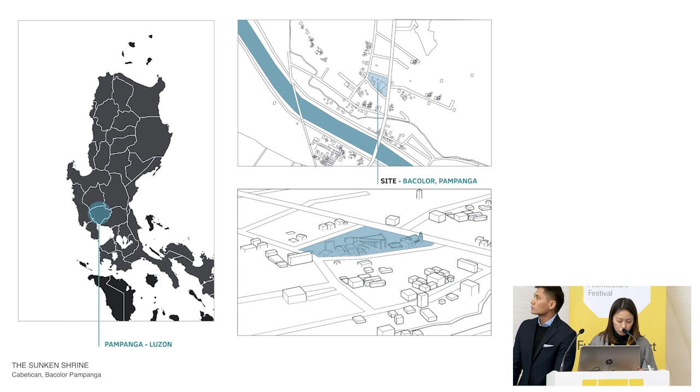The shrine is located in the small town of Bacolor, Pampanga, which is situated in a fairly flat land nearly on the center of the Philippines. Bacolor is sitting just below the foot of the mountains of Pampanga. One of the largest mountains sitting beside the town called Mount Pinatubo, however, happens to be a majestic sleeping volcano.

Day became night, keeping the skies dark for days. Communities have been evacuated to safer ground, yet the devastation was immense. The blast's volcanic discharge reached hundreds of kilometers and left towns within its perimeter covered in thick ash. There was zero visibility and hardly clean air to breathe.

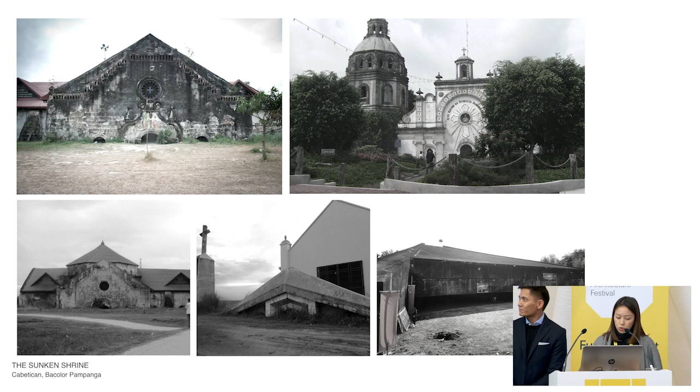From the eruption, it went on for the next 4 years with consecutive strong rains and storms, landslides that continuously channeled the ashes from the mountains into the towns, that became rivers of thick mud that painstakingly settled through time. At this point, people knew that it was never going to be the same. These are the photos of some churches and the shrine included at the lower right after the eruption.

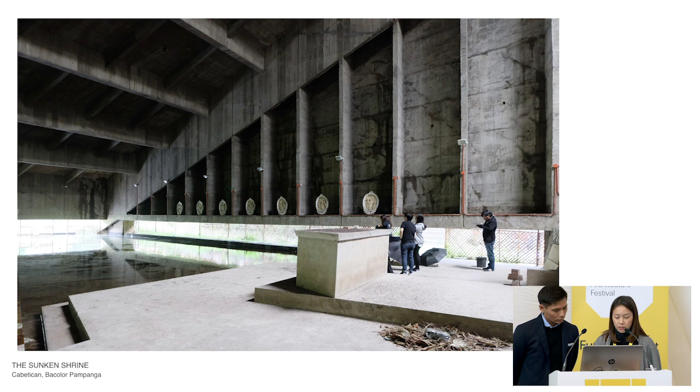As we entered the sunken interior space, we were absolutely awed of its beauty, order, and grandeur. There was a high chance for the structure to be revived, re-celebrated, and to resurface. The amplified horizontality and expansiveness of the temple engenders feelings of calm, serenity, and stability. Unfortunately today, with just little rain, it is already flooded and totally unusable.

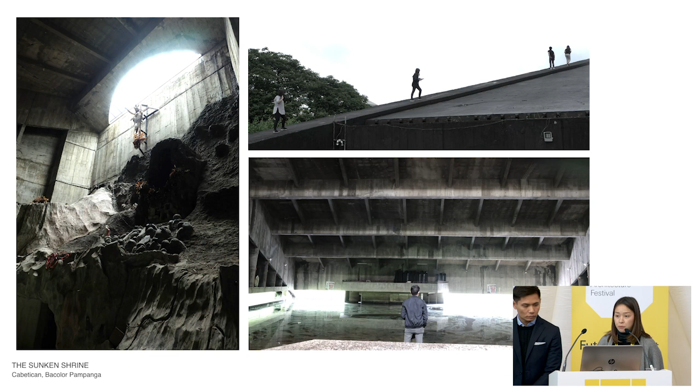Mount Pinatubo's fury may have severely altered aspects of the shrine, but the changes are not incongruous and may even be more in keeping with its raw and unpretentious architecture. Using our team as a scale, one must crouch to be able to enter the low openings, and the low lighting all contribute to the cavern-like atmosphere that, no less daunting than before, has become much more humble and intimate.

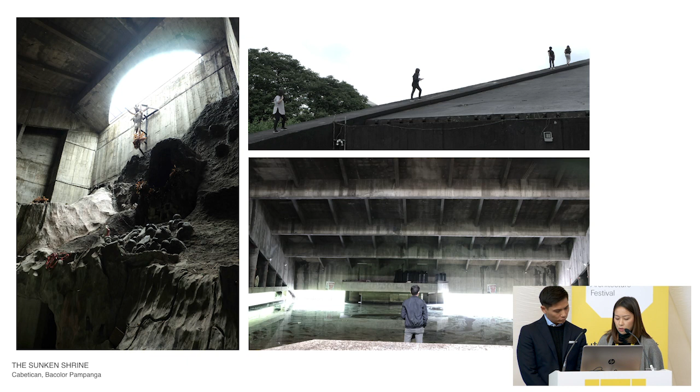Now we would like to present to you our design. Our primary goal is to create awareness in response to the rapid disappearance of some of the most important buildings in the country. This diagram shows the existing condition of the site. The transitional church is situated on the left, where masses are held.

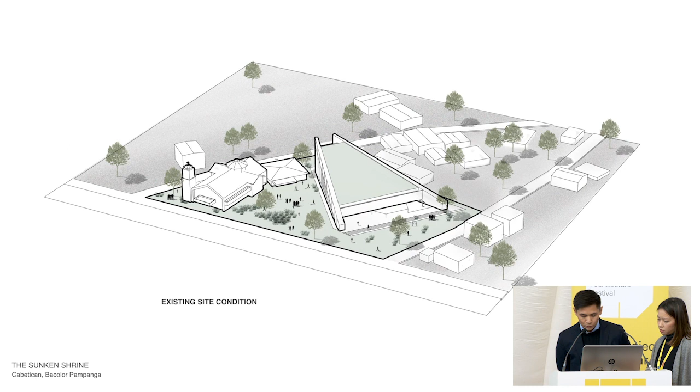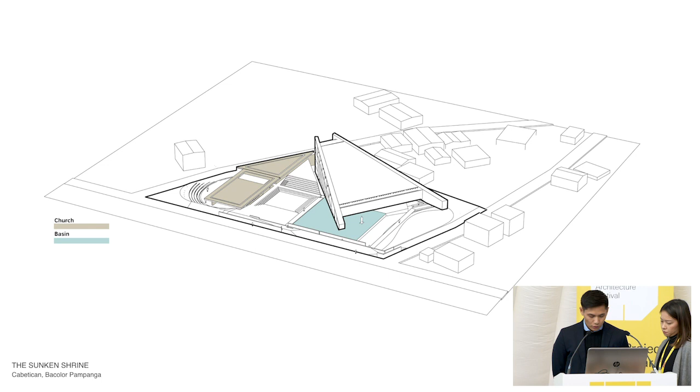In keeping things relevant, we simply flatten the structure to give importance to the main shrine, avoiding any unnecessary noises. We provided a large underground water storage in the center, calculated to store almost twice the amount of maximum flooding inside the site premises. To give it our full respect, we never considered doing any alteration to this wonderful ruin. Rather, we had to make sure that everything that surrounds it contributes to the overall experience of the community.

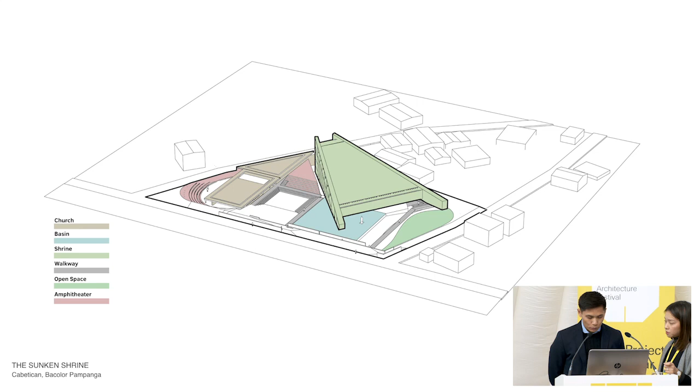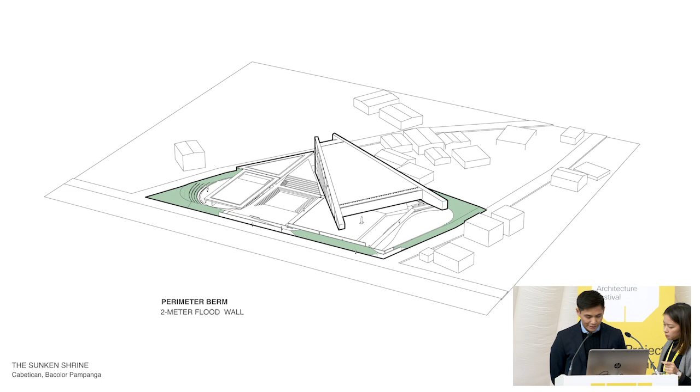The gray shade shows the floating walkways of the main public square entry and leads people through a processional approach to the shrine. The red shade shows these steps and seating areas along the edges and corners to allow public events. The green band shows the most important feature, which is the flood wall we integrated. It is designed to keep out water to the entire 5,000 square meter area, yet integrated with natural vegetation as berm.

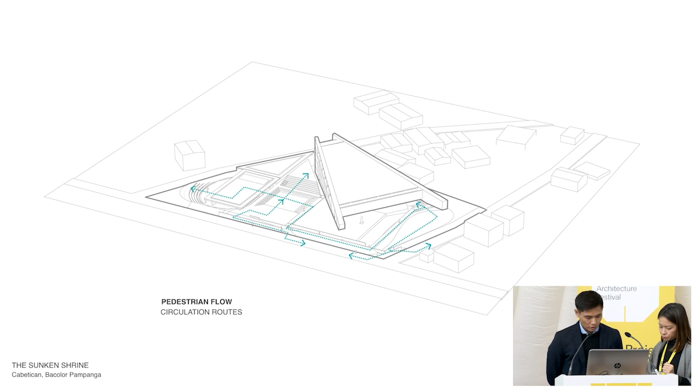This shows the circulation from the front entry along the road. It goes directly to the central square, which allows people to freely use the perimeter for recreation. Yet the approach to the shrine is through the reflection pool. The water collection system is designed hidden under the pool. It is capable of draining about 2.4 million gallons of water during the worst monsoon seasons. It will be pumped out once the water levels subside.

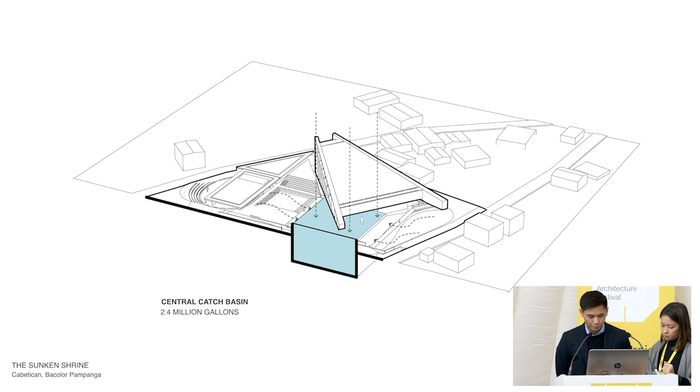This is an outline where we plan to locate locally sourced lahar sand, volcanic boulders, and raw vegetation. Since the lahar settled, turning greens and rivers into bright, hot, sandy surfaces, converting our roofs into roof gardens will then help decrease the reflection of unwanted sun rays and in turn minimize heat, a contribution to the reduction of heat island effect in the neighboring residential area.

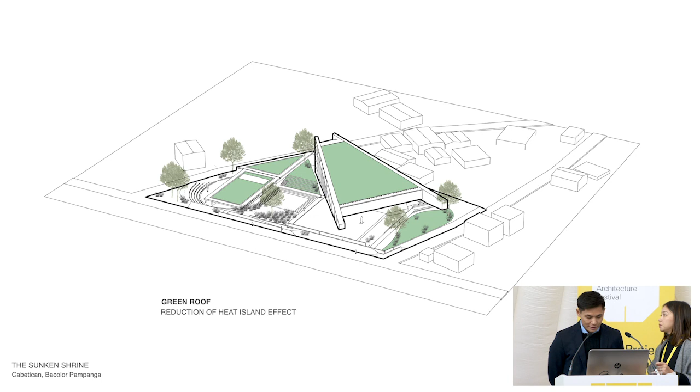Then this is the diagram of the designed new site. Our team's approach since day one was design in presence and in absence. Creating a flood wall that doesn't look like a barrier was crucial to the daily view of the town. We expect a variation of flowers blooming in various seasons. This is a view of the ramp showing the main shrine as the focal point.

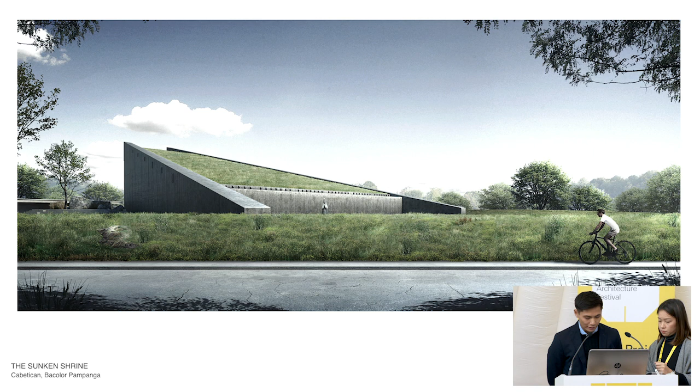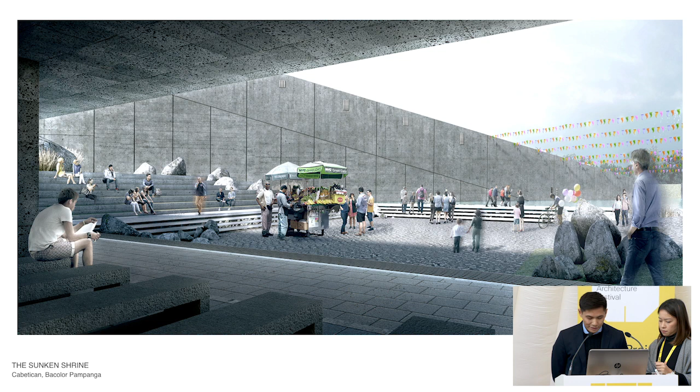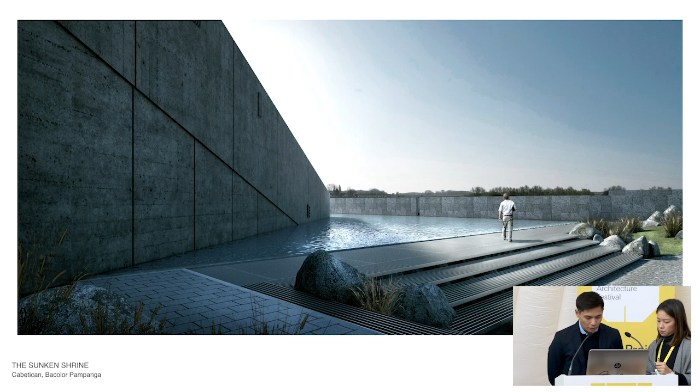Upon entry to the main grounds, there is a public square for the community to hold events or just enjoy a Sunday with families and friends. This space is designed for them. In approaching the shrine, fine modular stainless steel gratings were used for the steps and walkways. There is a reflection pool that will lead you to the entrance of the main building. The body of water is also designed for the children and the people who previously had a similar but smaller feature where they used to play.

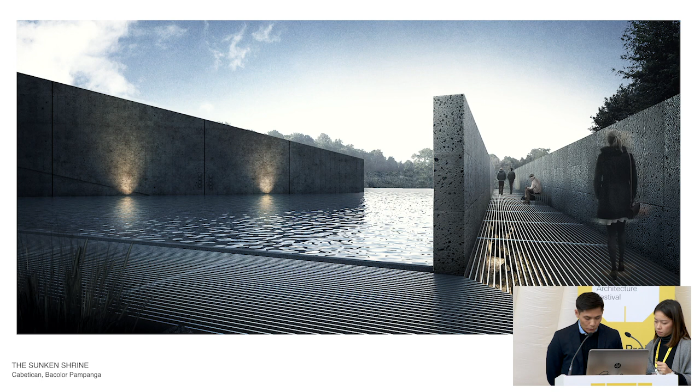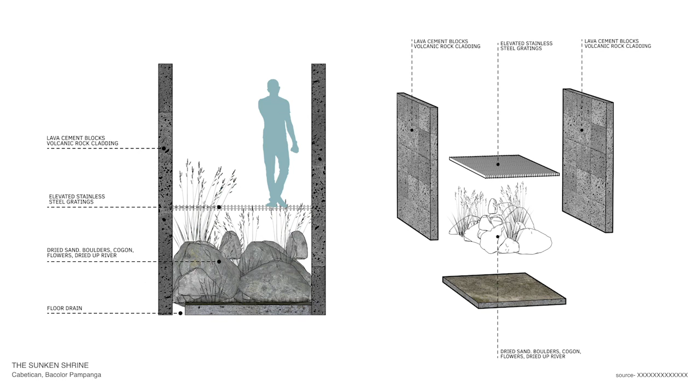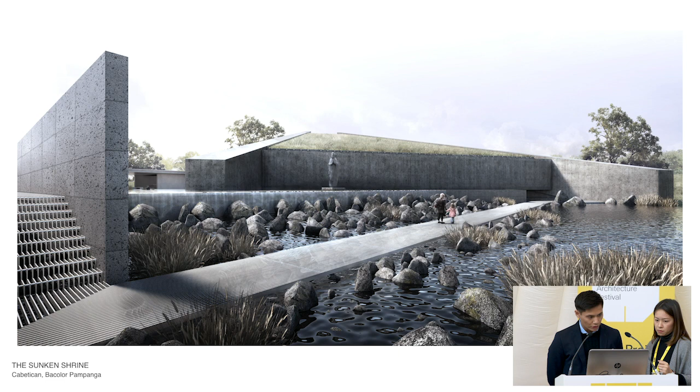This view is the final turn upon approaching the shrine. It reveals the facade, the original position of the statue, but then already floating above the water. The small opening on the right is the entrance of the building. Since we have a limited budget, we decided to use the simplest of materials. We plan to get them within a radius of a few kilometers. The cement requirements will come from Porac, a nearby town, one of the largest cement factories using lahar sand. Also, the wall finishes are in lava stone that came directly from the volcano itself.

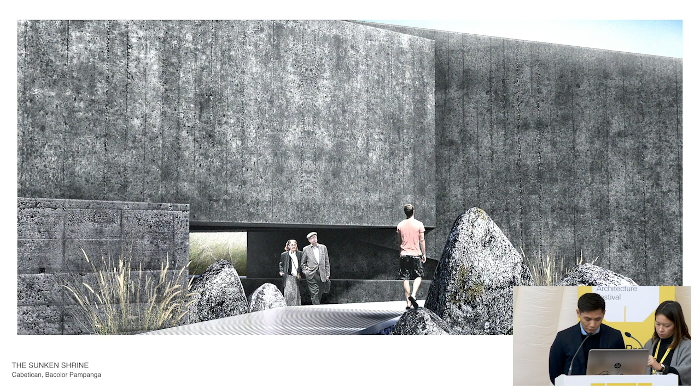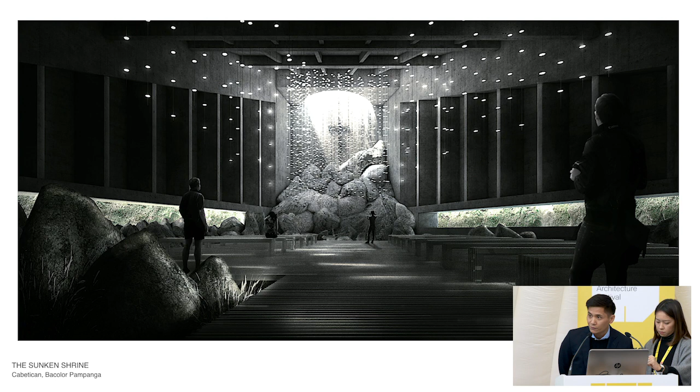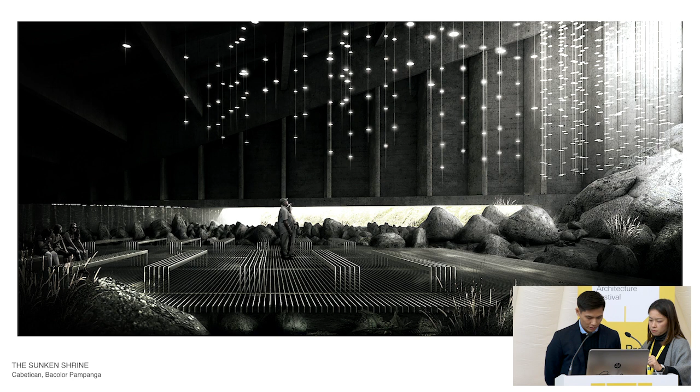We believe restoring such a building can somewhat restore the faith of the community. Since we knew that the people have been used to entering the shrine through these very low openings, we decided to keep that powerful yet humbling gesture in entering a sacred space. We kept the opening to only about 8 feet. And once one has entered, an interesting reveal of the volume will be experienced. The same materials will be used for the internal space as the main platform and also for the benches. Again, raw landscape was placed underneath the people to enhance its history. Such strong memories can never be erased nor forgotten.

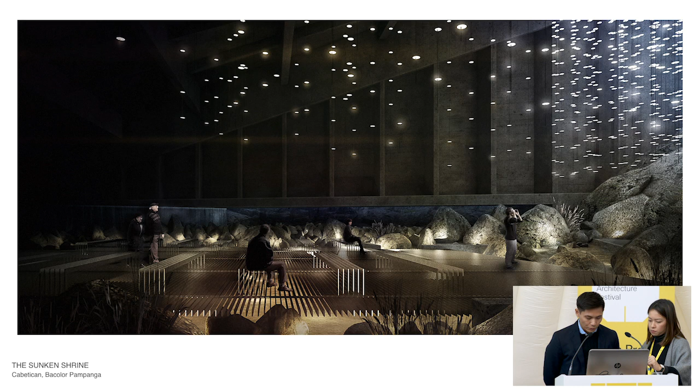These are suspended mirror reflectors that can allow natural sunlight to disperse from the skylight above. And at night, these 722 hanging lights will glow in remembrance of the 722 souls who perished. The lights, which are focused mainly on the landscape below, are an opportunity for one to reflect peacefully without any distraction and allow one to experience the raw textures and real history that we brought back into the internal space.

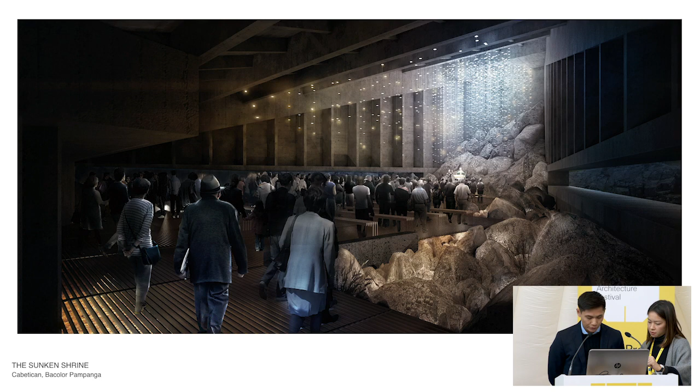In this final image, we show our vision of the community celebrating the space again. Though the Anthropocene is marking the moment of humans having power over nature, this approach is to remind everyone that the relationship between man and nature can reciprocate in perfect harmony.

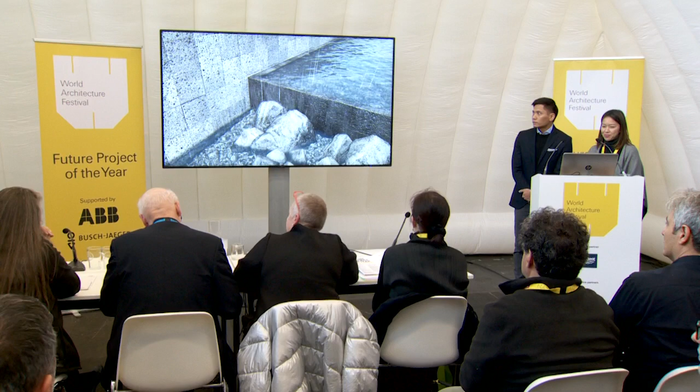Can I just ask, bringing the nature inside, are those rocks and boulders there, or are you bringing them in? And the second question is the light, the floating, is that device implemented by you, or is it part of the existing building? Well, thank you for the question.

First of all, these boulders are actually very natural to the site, especially within the town of Pampanga, which is actually sitting below the volcano. So these boulders are scattered, and actually they ate all the water streams and rivers around the area. So before, these green landscapes and waters now actually became a desert of sand. So what we're doing is we're just gonna bring everything there.

The actual condition of the site is actually sort of a higher flat slab, which is about this level. So you're digging out? Yeah, we're gonna dig it, but not completely. So we're just gonna make it work so that there's sort of an inlet of cool air, and actually the people can go through about 8 feet high.

And these lights are not there. If you've seen the photo earlier, the structure is actually completely bare. There was actually not too much funds from the government to revive it, and there's no tractor that can actually go inside there to dig it. So it was dug manually, just to make it reusable during dry seasons only.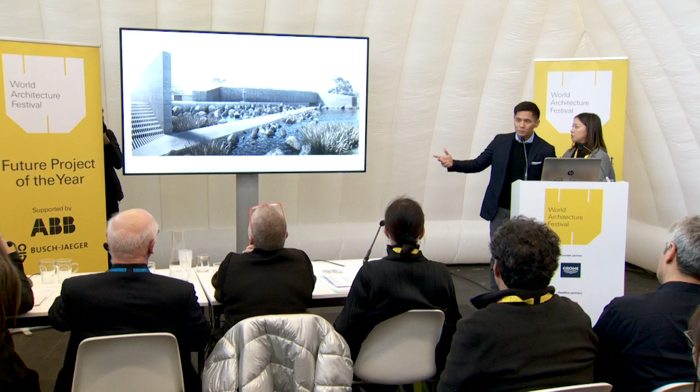That's a good question. This project is actually for the community. It's actually built by the community and was funded by the community. At first, in 1981, this building was actually donated by one single person, a private person, to the community. He lives there, but unfortunately, he passed away already. But we have a lot of donors who are very interested in doing this.

Our idea is, there are 20,000 or 25,000 devotees here, and there are like 3 feasts every year, and people really flock. It's like an entire, we call it a fiesta. Everyone is really there, inside, outside, playing. But the problem is, in this area, in actually the entire Philippines, we don't have too many parks like in Europe or in some parts of Southeast Asia.

So what we're actually doing is converting this very flooded site, and all our budget will actually go to the membrane that keeps water out, and just making everything work. So this can be their space, a community space in a public square, however they want to use it. There's no particular religion that is allowed inside. Anyone can use it.

And the light inside, we're very big fans of James Turrell. So when we went inside, there's sort of an adjustment to one's pupils every time you go inside. Give it maybe 2 seconds, 3 seconds, and you can actually adjust. So this is a very passive house design, not too much electricity. The lights are actually LED diodes, but nevertheless, they are reflecting mirrors. And we have a natural skylight above.